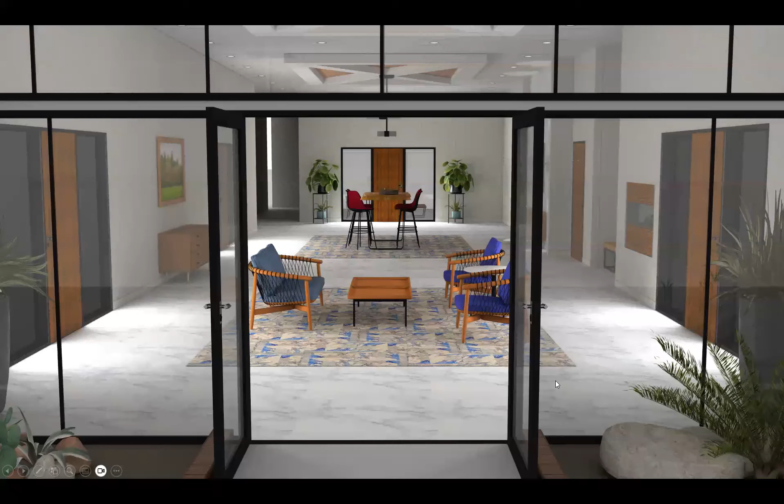This is it. This is the big one right here. This is what we're all aiming for. This is the photorealistic rendering. It's got depth, it's got texture, it's got accessories, it's got architecture. It's got things I'm not even focusing on. If you look beyond the space I'm actually focusing on, you can see there's furniture in other spaces. It has got everything that you want in it.

This, however, is one of the pitfalls of our business. This is what we think we should be shooting for all the time. And what we need to do is learn when to say stop. This, to me, is actually good enough. And I know you're all saying, oh, her tack board's not lined up. You know what? You can talk through that when you're presenting your materials to your customer, whether your customer is your salesperson, your A&D rep, or your actual customer. This is good enough. It gives the customer a good glimpse into what their furniture is going to look like.

So let's talk about how we're going to get to talking about good enough. We're going to go over some basic rendering settings, what are some baselines you can use to get a rendering that's good enough, some accessories, some tips for adding enough accessories to get a good enough rendering, walls, windows, and other architectural features. And this is a really important point: step number 4 is when to stop tinkering with it, because your time is more valuable as a designer than a visualization specialist. You're the only one on your team who can do the specs, the programming, the installation drawings, the power coordination drawings, all of those things. There are other people you can send your project out to if you really need it to be a high level of visualization. You need to do what you do best, not try to do what somebody else does best. It's hard. It's a hard thing to accept.

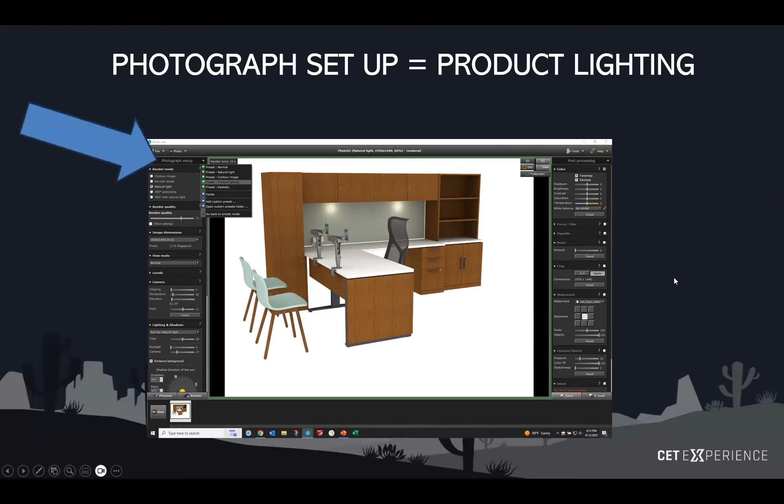So let's start with my basic rendering settings. This is my go-to for almost everything. The minute I open up Photo Lab, my fingers go there, or I have it as a preset, and that's where I start for everything. First thing, right up here at the top with my photograph setup, I go to product lighting. That was my first one, photograph setup. My next one, render mode, natural light. Works for me, gives me a great picture. I don't have to think about where else I'm going to go with it.

Next one, rendering quality. This is going to shock you: 70 to 80%. And I can hear you saying right now, why not 90? Why not 100%? First of all, I'm going to start with my render time. At 70%, I rendered this in 19 seconds. When I've rendered things at 100%, I've had time to go get a cup of coffee and chat with my friends and come back, and it's just then getting to my green border. And the picture quality, honestly, it's really not that much different.

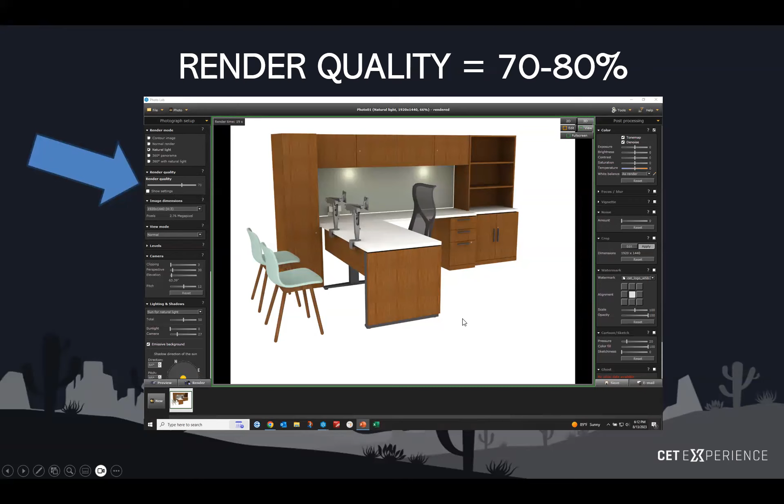70% was good enough. My image dimensions, it's that standard 4:3 dimension that you see in magazines, other visual materials. So it's 1920 by 1440, 4:3 rendering. It gives you a great picture. Lighting and shadows, I use sun for natural light.

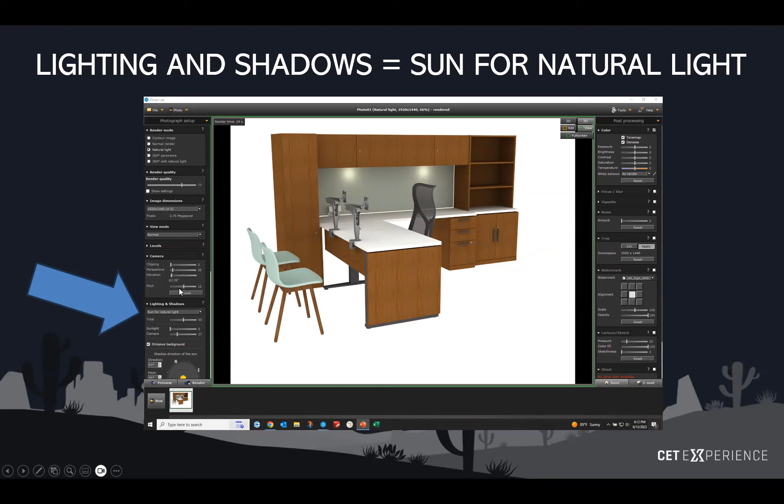The next thing down—trust me, if I'm not talking about something, it's because I don't touch it. I'm skipping it on purpose. I don't need to fiddle with it.

Camera. The camera actually adds an element of flash, like a flash bulb going off in your picture. It brightens it temporarily, just for the length of time it takes to create that picture. I set mine based on the kind of finishes I have. This is kind of a medium finish, so I'm somewhere between my 20 and my 30. I'm at 27 because it tends a little dark. But if it's a very light finish, I don't want it to wash out all the color, so I'll put my camera down at 20. If it's a very dark finish, I might go up to 30.

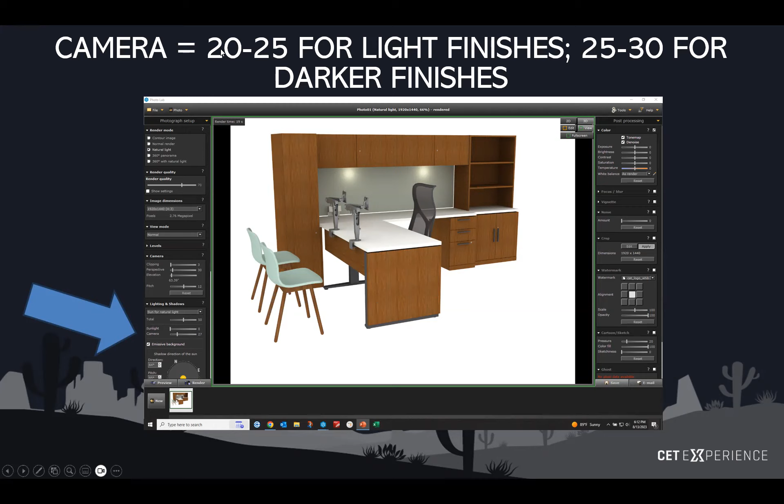My shadow direction of the sun—high noon. Put that sun right on top of that dot in the middle. I don't want to see any shadows down here. Very rarely do I have shadows in my office, even though my desk is one away from the window. It's just distracting to the viewer.

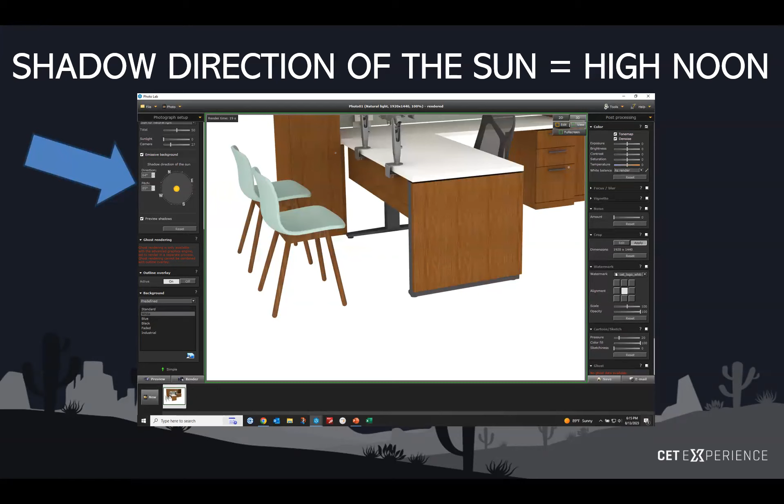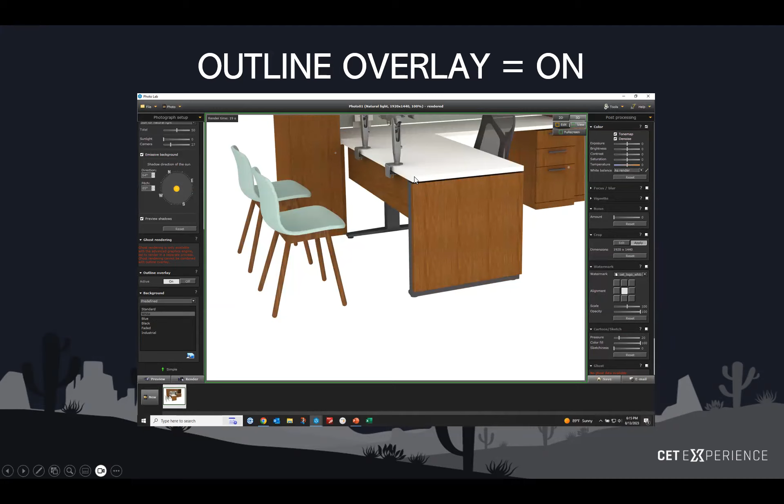My outline overlay I actually keep on, and I keep it on for a reason. A lot of times I render things in white, and the edges get a little mushed out—you can't really see where they are. If I turn on outline overlay here in my post-processing, I'll get a little gray line that makes it look just a little crisper.

So, post-processing settings—that was a good segue. I have color open because I'll play with the brightness a little bit. Sometimes I don't hit that flash just right, so I might lighten it up or darken it up a little using the slider here.

All of these I basically keep closed because I don't use them on a regular basis. I use crop—I get rid of everything in the picture that I don't need. I'm focusing on the furniture for my customer. I don't add a watermark. I very rarely use ghost rendering, but like I said, I do use outline overlay because it gives especially white finishes just a little bit of an edge so it looks more three-dimensional. I can play with that line thickness using the opacity or the line thickness setting.

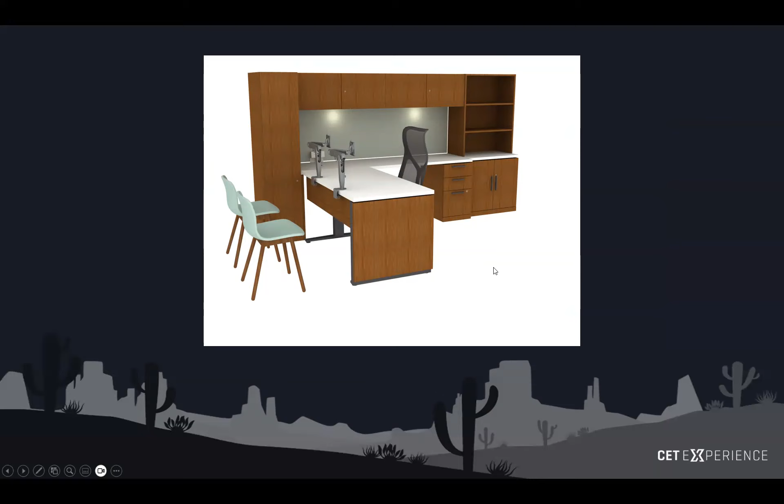There's my rendering—that's my rendering with all those settings. You can see I've added a little outline overlay to crisp it up a bit. It's fairly well cropped—I probably could have cropped it a little better, but it shows the product to advantage. You can see a storage cabinet, a box file, a height adjustable desk with a shroud and some storage, two chairs, monitor arms, and a task chair. It's good enough, and that's the point I'm trying to make.

Stop. You can stop right there. It really is good enough. The customer can get a sense of what they're buying from that picture.

So how do I get there? I use standards. I talk about Class A renderings with my salespeople, Class B renderings, Class C and Class D—or why am I spending so much time on this? Those are the rendering standards I've been used to discussing with my salesperson. They come to me and say, I need a quick rendering because I'm going into an exploratory meeting with a customer. I say, how quick is quick?

Do you want a white sweep? Do you want a little bit of background? Do you want some details, or do you want a full architectural environment? White sweep, I can knock out five of them in the next hour. But if you want to go up higher, it's going to take more time. Since I work specifically with one salesperson, I can always say, hey, if you want me to do this, I don't have enough time to do that. Everything is a negotiation.

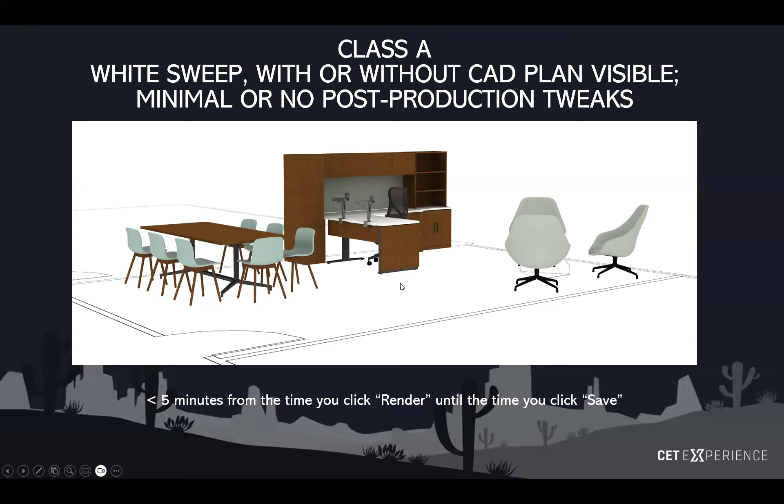So Class A is a basic white sweep, with or without the CAD plan visible. When I do a white sweep, I kind of like the CAD plan visible because it gives a sense of the furniture in the space without taking the time to build the walls—minimal or no post-production tweaks. I'm talking less than 5 minutes from the time you put the furniture in the space, set your camera angle, apply your presets or bring in a favorite, and it's less than 5 minutes from the time you click render until you click save. More often than not, it's a minute because you're happy with your first one, since you've gotten all your presets. I've got just enough crispness here so my furniture looks really good and shows the space.

Let's take a little side quest here. How do I make the CAD plan visible? This is the difference between the chartreuse—or I heard someone call it Grello, I like that—and blue boxes in 2D. If you haven't used this feature, I use it all the time. So let's take a look at it.

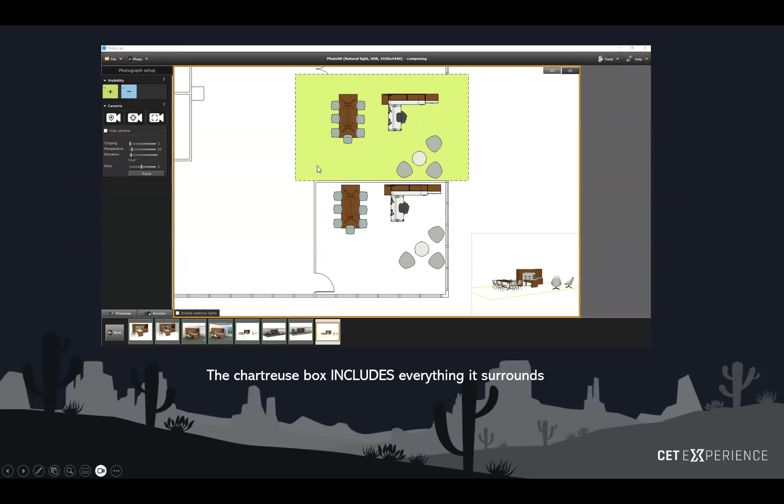The yellow, chartreuse, or green box—depending on your screen's color—includes everything it surrounds. Notice it's not surrounding my entire CAD plan, so it's only including things inside its boundaries. If you look at my 3D glimpse here, you can see there's no CAD plan at all.

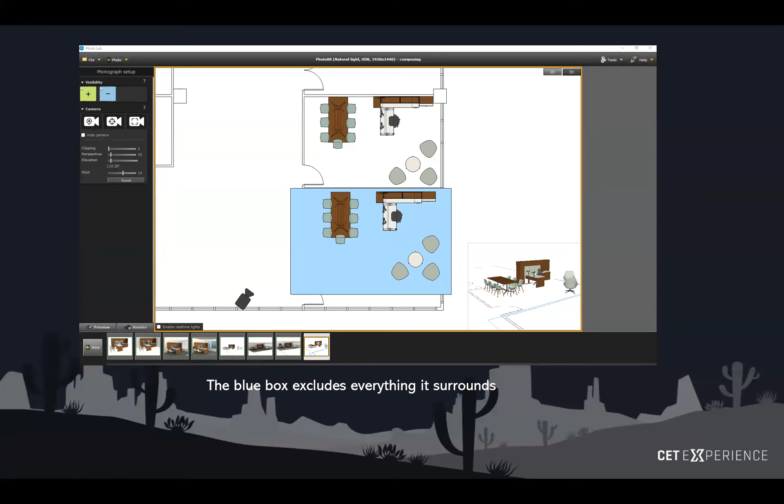The blue box excludes everything it surrounds. Here, the blue box isn't surrounding my CAD plan, so it's not excluding it, but it is excluding all the furniture in this office. You can't see it here, but you can see this office with the CAD plan visible. A lot of times with 2D renderings, you'll see blue boxes all over the place as I exclude things to get down to what I want to see, rather than including what I want to see. So, mischief managed.

So I maybe spent 10 to 15 minutes adding walls and accessories—likely not, because I have all of those saved as favorites, and we'll get there. I only did one rendering attempt, maybe a second to clean it up a bit. Total time after the furniture is built: less than 30 minutes, probably closer to 15. I'm adding very little time to my project.

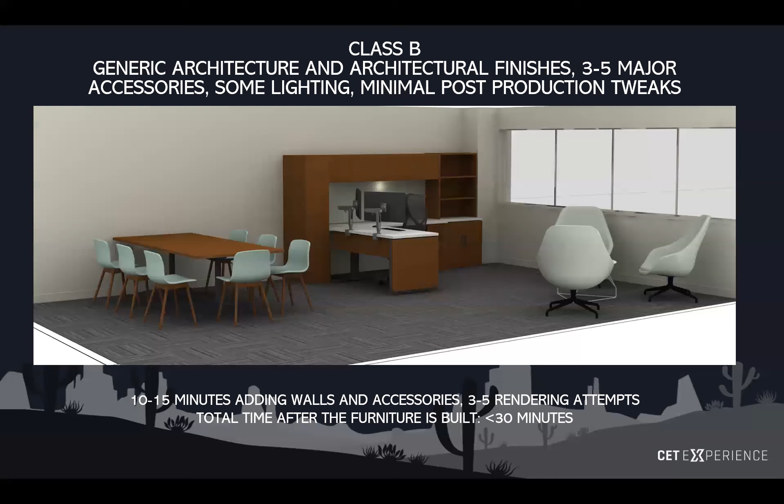So Class C is Class B plus some more accessories, an exterior environment, and some personalization. Again, I don't spend a lot of time creating additional architectural features and finishes because I have them all saved—I can just quickly import them into my plan. So maybe 10 to 30 minutes, 15 to 30 minutes, creating additional architectural features and finishes. But honestly, it still doesn't take that long if you set it up beforehand in your copious amounts of downtime, right?

Again, honestly, if it takes you more than 20 minutes, you're not using your standards and favorites correctly. Remember, this is to get it out to your customer—whether it's a customer, your salesperson, or your A&D rep—as quickly as possible with still a very good product.

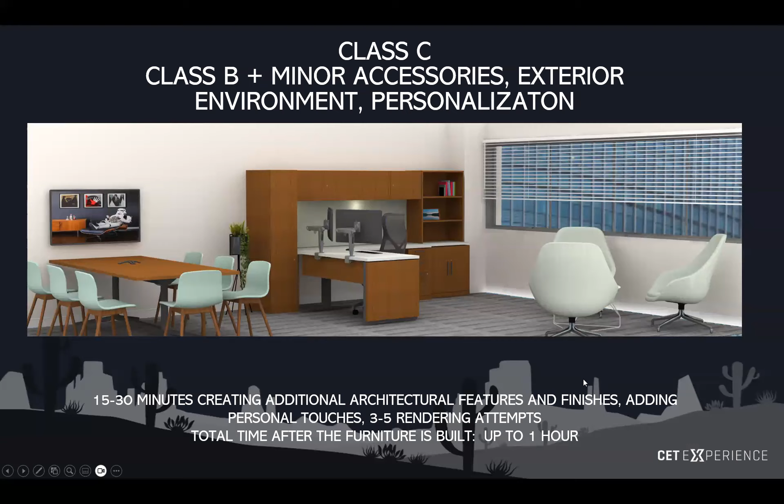So stop right there. Stop at level C. It's more than good enough. You've gotten the product to your customer in a good amount of time—you really don't need to go on.

But just for argument's sake, let's talk about where I started and where I finished. This is where I started, and this is where I finished. If you'll notice, I zoomed in a little bit, but the camera angle hasn't changed. I added some things—where I started, where I finished, not really that different.

So how I got there from Class A to Class C, I used standards—I talked about it a lot already—adding standard architectural features and accessories. And here's the most important part: I never changed my rendering settings or my post-processing settings. I'll say it again, not just because I fumbled the first time, but because it's important. I never changed my rendering settings or my post-processing settings. I didn't fiddle with anything except adding more product to my photograph.

Remember, this is where I started and this is where I finished. The only thing that's different is the material that I added. I did not change my rendering settings at all from those settings I gave you at the very beginning of our presentation.

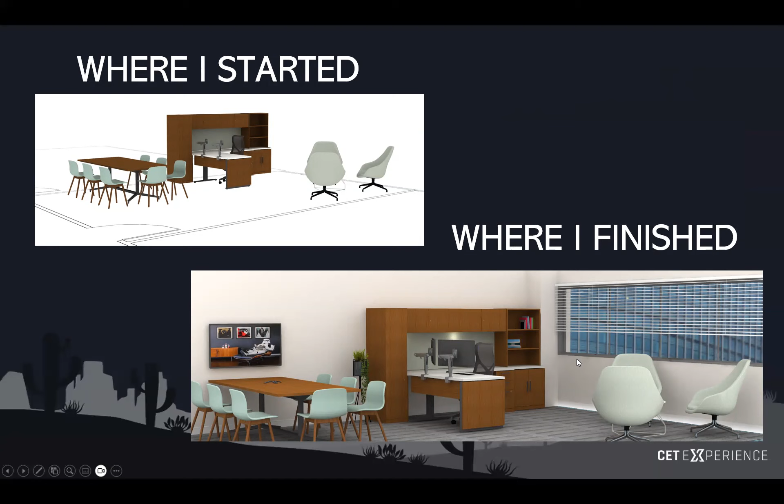So how did I do that in less than 20 minutes? I've talked about it: standards, standards, standards. I have a standard accessories package, a standard architecture package, and standards for my architectural finishes. I very rarely deviate from them.

So let's talk about that, my accessorizing and architectural standards. Let the furniture tell the story. The furniture is what you are selling. You aren't selling the view out the window, that's the real estate broker. You aren't selling the pencils and the pens and the Post-its, that's what Staples does. Let the furniture tell the story.

Consider the rule of 3, or the rule of odds. You'll notice I had some books, a picture, and a plant. That's pretty standard for me. Just enough to give it a little personalization without making it look sterile, or like those offices where we've all done inventories and walked right back out again because you can't see the furniture for the stuff.

So quick tips for accessories, and we talked about this: use favorites. Let's get over to my CET screen here. You see this is the picture I made for you. I used this drawing.

If you notice, when I hit F for favorites, there's my two walls. It's a 10 by 12 office, right hand, two walls. It's already painted, I don't need to worry about it, I just drag it in there.

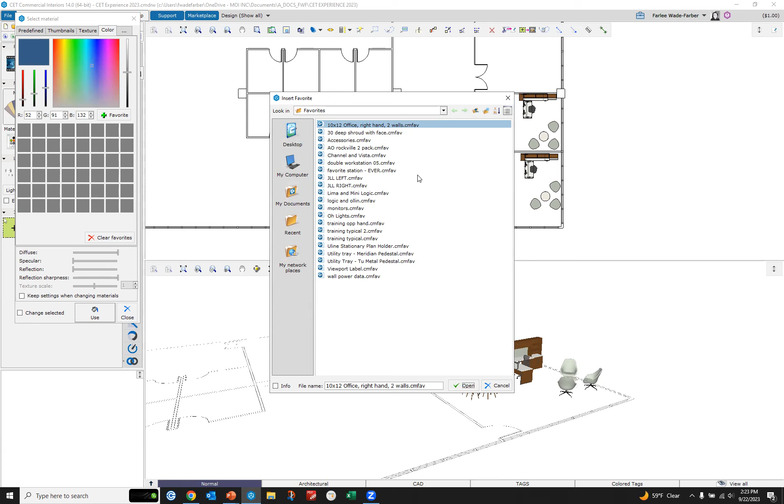I have my accessories package. If I open that and just drop it here in my drawing, you'd see there it is: my plant, my picture, and my books. I very rarely change from that.

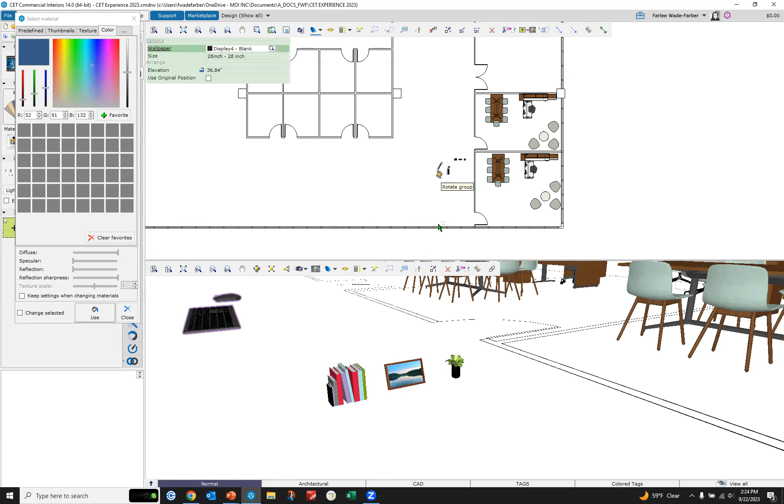Going back, you can see I have monitors, and it's actually monitors and a keyboard, already set at the right angle, at the right height. I don't need to stop and fiddle with it and tweak it because I have it as a favorite.

Other favorites I have are overhead lights. I work with a lot of manufacturers, and every time I drag a light in, it asks if you want to turn it on. Then I turn it on and it washes out my picture, it's not the right color or it's way too bright, and you have to stop and fiddle with the lights. I've stopped fiddling with the lights.

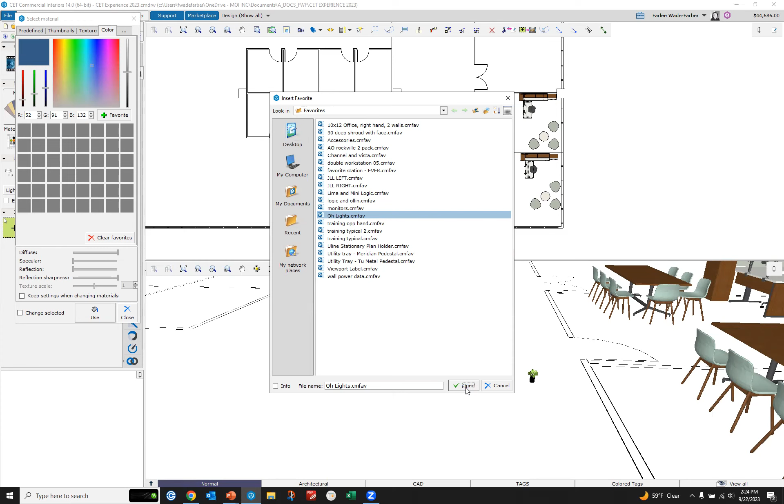I created two little Omni lights that are right here. I know they wash the tack board with exactly the finishes and lighting I want. So I just take one and drag it right up under my tack board, next to my light. I might use page up or page down to put it in the right space, usually right under my overhead, and it washes it just fine.

I don't have to say, for this company's lights I need to put it at that, and for that company's lights I need to put it at this. It's all right there. So you can see that I've done a lot with standards.

Just because CET has a symbol for it does not mean you have to use it. There are lots of great symbols in CET, there's even a cake with strawberries on it, but just because it's there doesn't mean I have to use it.

Don't take personalization too far. Don't worry about finding a picture of a family or something like this. It's a generic landscape.

Avoid overshadowing the furniture. If the first thing you notice in a picture is the accessory, delete it. And I actually deliberately made that mistake in this rendering because for me, the first thing my eye goes to is the stormtrooper on the Eames chair.

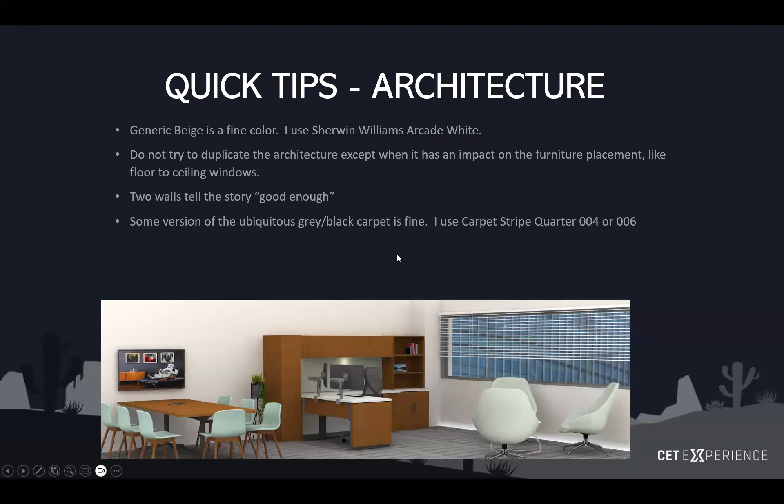So quick tips for architecture. Generic beige is fine, I use the Sherwin-Williams Arcade White. Another quick side quest - I go out to the Sherwin-Williams website.

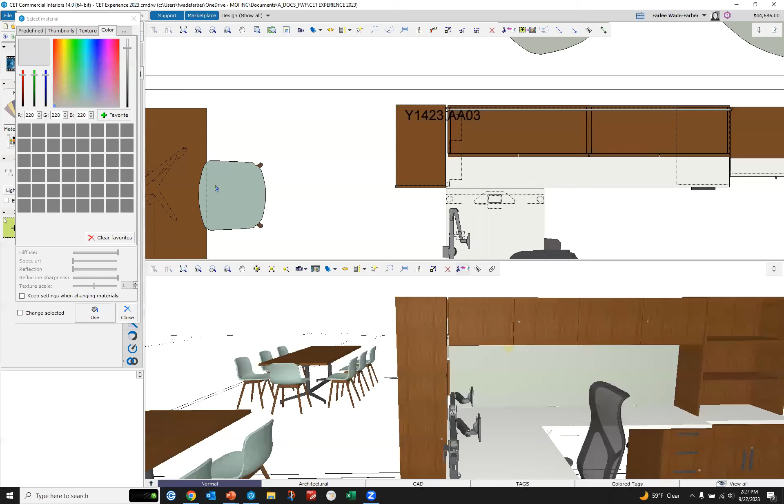You can see there's an RGB value here. I can take that RGB and put it in my materials and it will come out with Arcade White, or I can take a snippet of this Arcade White and create a material out of it. If I go back to my CET, if you do this material, I can put in my RGB right there. It comes up as Sherwin-Williams Arcade White. I can save it as a favorite and have it forever. I can paint whatever I want Arcade White, which is a great generic kind of beige. I used to call it apartment house beige, now I call it office beige.

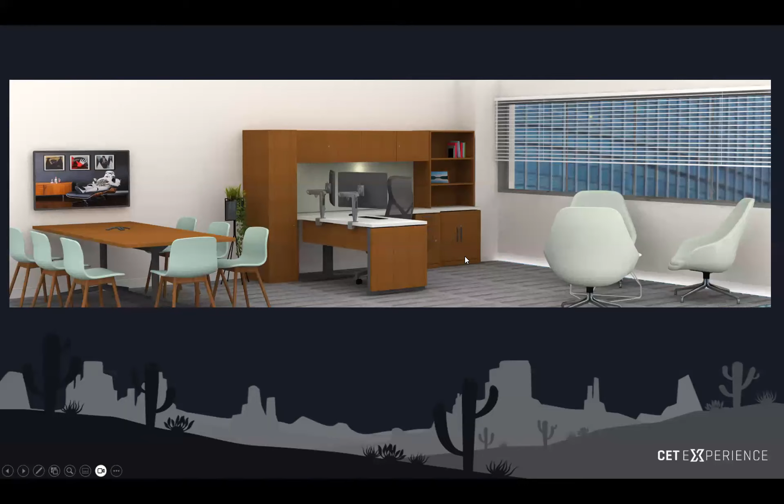So I have my generic Arcade White, I have my generic floor, it's just there. Stop - you can stop right there. It's better than good enough. That's a great picture, if you ask me. It tells the story of the furniture. It gives the customer a really good idea of how their furniture is going to look in their space. It does what it needs to do. So you can stop right there.

But we're designers, we're perfectionists. We're perfectionists because we're designers, or we're designers because we're perfectionists. We want the Class D. I know some of my colleagues have already done many presentations on getting to that photorealism. I call that Class D, or 'darn it, I went down that rabbit hole again.' Here poor Alice is going down the rabbit hole. She's got a Queen Anne table and maybe a bird cage and some picture frames and a vase on a shelf. She's drowning in furniture as she goes down that rabbit hole.

What is a Class D? It's a full architectural environment with real-to-life finishes. It adds personal touches like the logo of the company, more than 3 accessories, custom finishes. You've gone through the 100% CDs and said, oh, this is the paint and this is the carpet, and you've gone out and created these finishes. You've put artwork on the walls. You've done more with specialized lighting. You've done better with the exterior environments than the general high-rise outside of the window. You've done multiple rendering attempts and tweaks, and extensive post-processing to get the kind of rendering that looks like this.

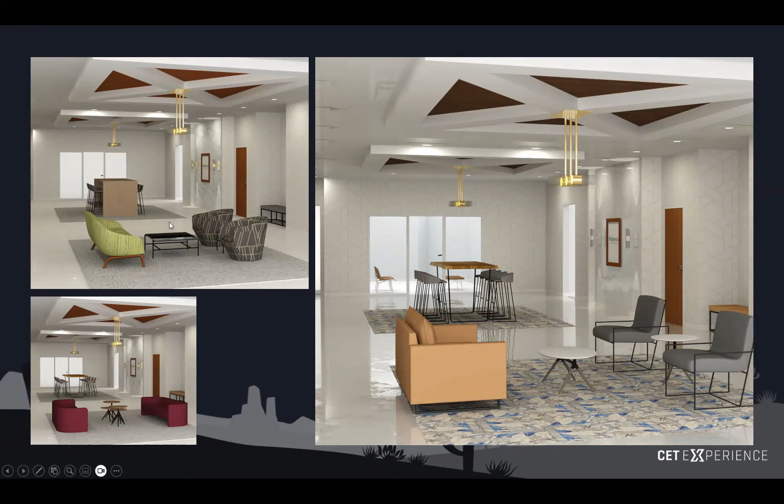This was a real-life job. The salesperson went through 3 choices of furniture. This was the final, but she demanded, even after I pushed back, that it look as photorealistic as possible. She had me build the ceiling. This is the actual wallpaper in the space. This carpet - if you're familiar with the product, floor tiles, they come in like 18 by 18 tiles. The customer was going to use it and put it down as a quarter turn.

So I took a picture, a little snippet of the carpet, and put it on the floor. Then I rotated it a quarter turn and put the next one down, and the next one down, and the next one down, until I built the entire carpet. It was painstaking, it was time consuming. And it was time consuming to sell 8 stools because the table was already there, one 2-seater sofa, 2 tables, a bench, and 2 chairs. That's what was sold - that was the end proposal to the customer, that was the product that was on it.

But instead, I went crazy. I went crazy 3 times to do this. You'll notice I didn't really care for any of the chandeliers that were in CET, so I took the sconce and rotated it and stretched it out and turned it into a chandelier to make the 2 of them match.

I added a picture on the wall with the logo of the company that was going to receive the proposal. Not only did I take a picture of the carpet, but you'll notice my carpet has height. I actually did it as a material and had it superimpose upon itself to give it depth. It was absolutely crazy to sell this job.

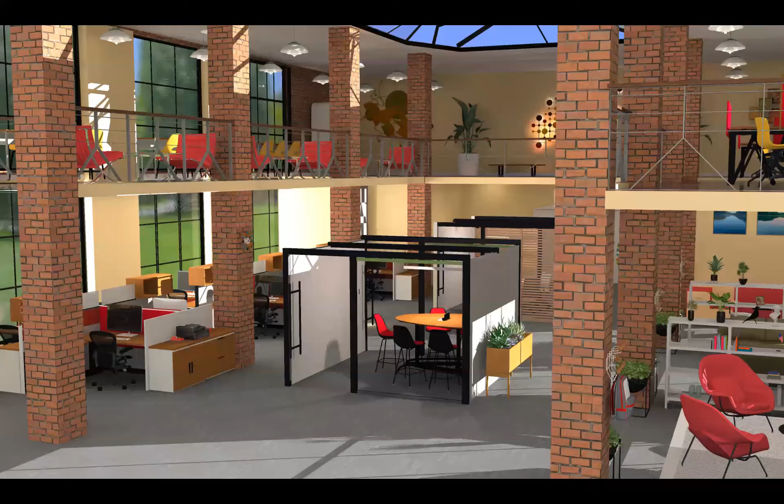This next one was a made-up picture. It started out as a real job, and then when I wanted to enter the Herman Miller rendering competition earlier this year, I went a little crazy. I added wall art with lights behind it, a skylight, pictures, stuff all over the shelves. I hung a backpack on the Eames hang-it-all and put the Nelson clock on the wall. I think the bird is around here someplace too.

I added an exterior environment and put in a railing around my balcony up here, even though a balcony wasn't originally part of the job. This room just had huge ceilings. There's more artwork, the standard Herman Miller black and white picture back there. There are tables behind here that are lit up, so that's why you can see light through here. I put the sun through the window.

I did crazy, crazy, crazy amounts of stuff for this rendering competition, and it was fun, it was great. It let me stretch my wings, but to do this for an everyday job is not going to happen. So stop, if you find yourself doing that, stop. You've gone too far. If you're spending that much time rendering, you're not spending time specifying, coordinating with options, doing your COMs.

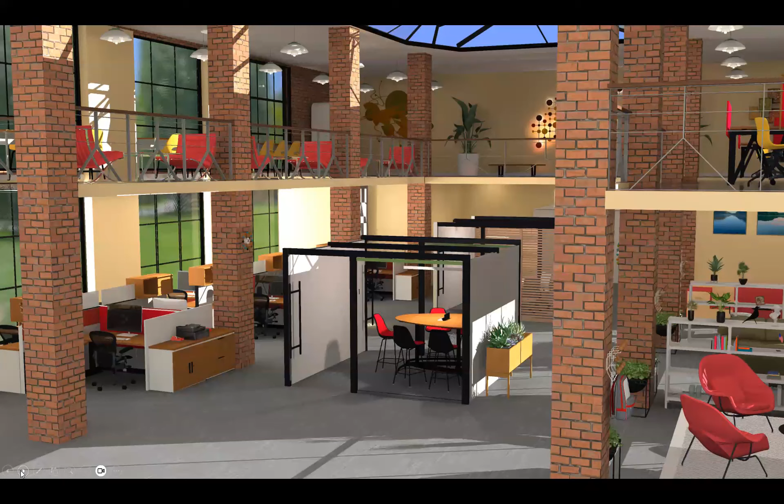So quiz time. Let's go back to those two renderings, or we'll just talk about it here. How much time do you think I spent on those renderings? Let's go back and look at them one more time, this one and this one. How much time do you think I spent? This one was 30 hours, from the time I built the first wall through the time I did the last rendering with the product in it.

From the time I built the first wall to the ceiling, to the lighting, to adding all of the rest of the pieces, the marble floor in the exact marble, the carpet that I told you how I built literally square by square by square, the unseen elevator lobby back here. It just took a really long time, 30 hours.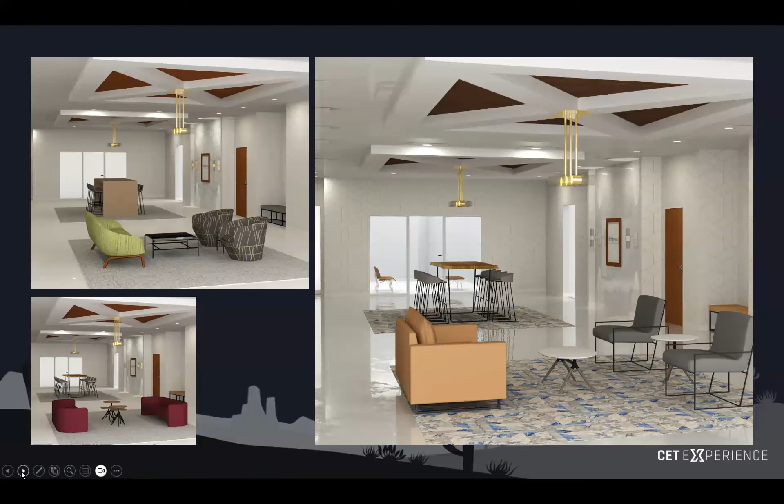This one, probably at this point, by the time I changed my pillars to brick and added some more accessories, I'm guessing it's upwards of 70 hours, simply because I wanted to do a good job and wanted to win the contest. Did I? No, but that's another story.

And why did it take me 70 hours? Because this was rendered at 100%. From the time I pushed the button render until the time that green border came on that told me my render was done was upwards of an hour. Each attempt took almost an hour. Now, that was not on the computer I use now, it was on the computer I used before. This one would probably do it in about half that time.

But still, I spent a lot of time waiting for the final picture to show up, only to say, oh shoot, I goofed that up, and go back and fix it and try it again. Now, granted, I did this all on my own time, and in that hour while the computer was working, I was doing laundry or whatever. But still, it took a lot of time to get that far. So there's our quiz time.

Next thing we're going to talk about today is resource allocation, and I've hinted at that throughout this entire presentation. Return on investment: for the investment you're making in these renderings, what are you getting out of it? So let's talk about what your investments are. You're thinking, oh, it's just time. It's not just time, it's also equipment.

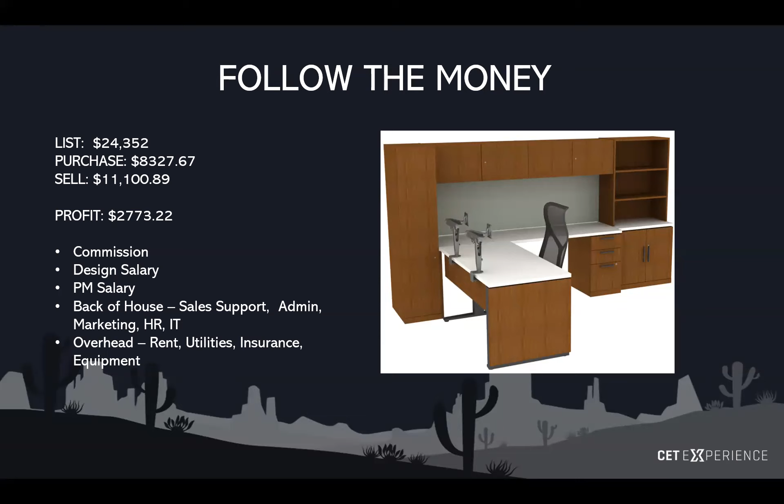Equipment - we talked earlier about my computer, that this is the 4th computer I've had in 6 years. That's a lot of money to spend on equipment. So next time you go down that rabbit hole of rendering, or someone wants you to go down that rabbit hole of rendering, think about where you're spending your dealership's money. How much money is coming in? How much money is going out? Look at some of these wonderful outsource firms that do this sort of Class D rendering or upgraded Class C, probably much faster than you can and much cheaper than you can. And you can spend that time on tightening your specs, working with your salesperson, all of those things that I mentioned earlier.

So I talked earlier about standards programs. How do you start a standards program? How do you get buy-in from all of these people to say, okay, I'm the design manager, we're going to start with standards for all of our rendering? You've got to get buy-in from your management. That's pretty easy - you tell them how much it costs to make a rendering, how many hours your designers are spending on it, and they're going to say you need to shut that down a little bit, you need to help people tone that down. Talk to your salespeople - what is it you exactly need from us? There will always be that one salesperson who says, I need photorealism all the time.

You pull them aside after that meeting and have a private conversation with them. What are you willing to pay for this? How much money are you willing to spend on photorealism? How much do you think we need to do it to be competitive in the market? Would you rather get it fast and pretty darn good, or would you rather wait while it goes out to a renderer and maybe not get it for another week?

You need to talk to your A&D rep. They're one of the people calling and saying, hey, I'm going to go meet with this architecture firm, do you have some pretty pictures I can show them? Yes, I have a library of them, I can send them to you really quick. But when they want a pretty picture of a product that just came out, I've got to build something in it, check the spec book because I don't know what I'm doing yet. The place I'm not going to waste time, where I'll streamline my process, is that I've had all of my rendering standards. You're going to get my two walls, my outside view, a couple accessories, bang, you're out the door.